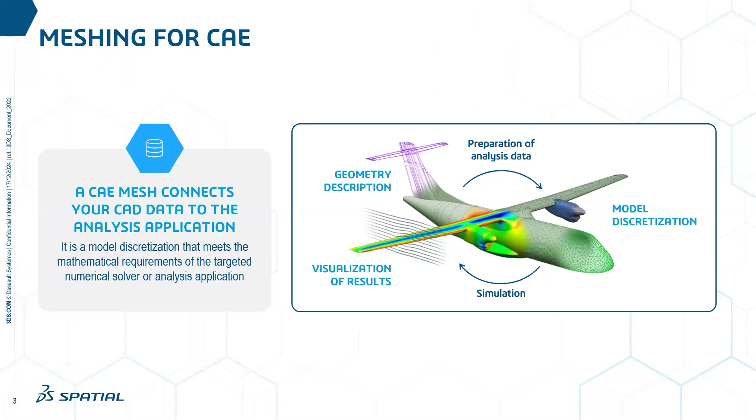In this context, this workflow, meshing is the critical link between the geometry and the solver, and thus we have to make sure that the mesh generation process is well integrated and produces reliable results tailored for the solver. I'm saying tailored because a mesh suitable for CAE application is a very special type of tessellation.

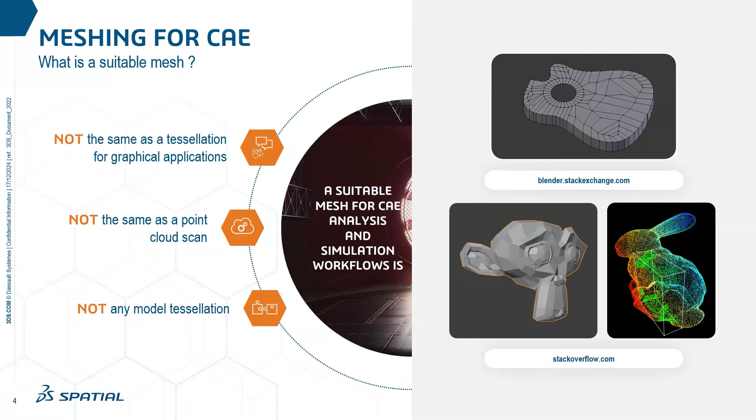So I want to give you two quick examples, two well-known examples of situations where you need to respect mathematical constraints. The first one is FEA solver validation. There, we usually want to have a consistent tessellation across an entire geometry in order to properly observe the convergence towards a solution when we're using more and more refined meshes.

And the second example is called the CFL condition for finite differences solvers. This condition has to be respected to ensure stability of these solvers. And here, for simplicity, the example is for 1D cases, but we already see that the condition depends on delta x, which would be the equivalent to the mesh size. So the stability of the simulation depends on the input tessellation.

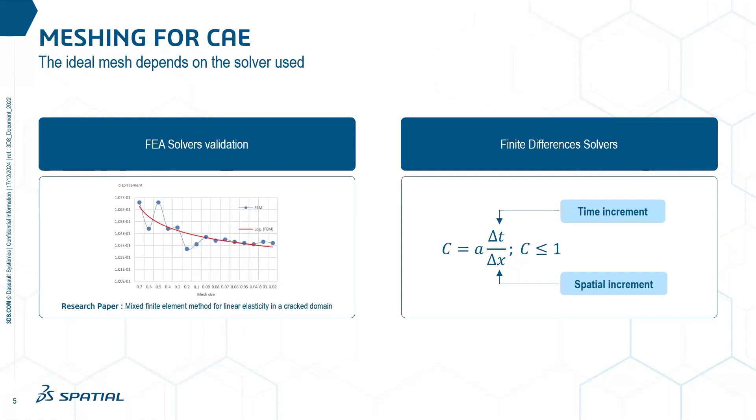And these are handpicked examples, but there are many other industry-specific solvers out there to model different types of behaviors. We can take a couple of examples. In the plastic injection industry, for example, there are solvers that model how the plastic flows through a mold, how it cools down, where weaknesses may appear in the geometry, etc.

In 3D printing, there are solvers that model how effective a given printing nozzle is, how it draws air from outside and maybe creates bubbles in the heated plastic that will later create discrepancies in the printed geometry. Or in a completely unrelated area, the medical field, there are also solvers that model how the heart of a given patient beats with and without artificial parts in it.

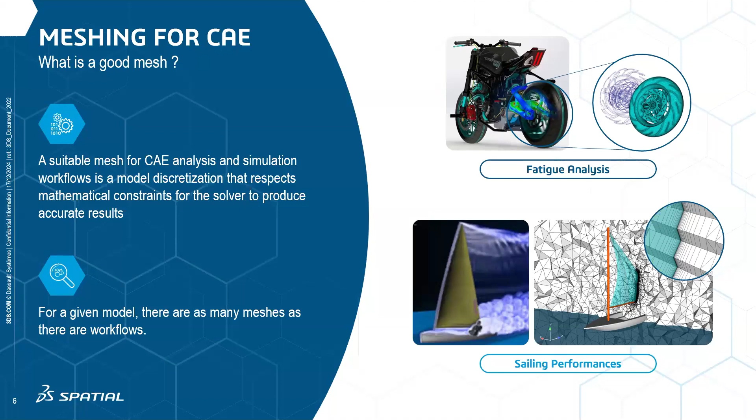You have other examples on your screen, but where I'm going with that is that all these solvers have very different constraints regarding the type of mesh they support in order to get meaningful results. So in order to support this variety of needs, at Spatial, we provide a complete set of automatic meshing components that are able to handle various types of inputs. They are able to generate a wide variety of meshes for different use cases, and they also have a large set of parameters in order to make them tightly fit the needs of the application.

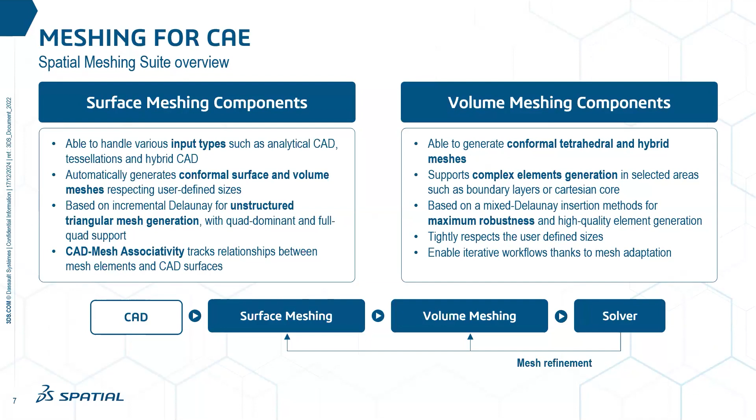However, this high level of customization can be a bit overwhelming when first being introduced to the product. And so in the next part, I want to talk about some of the usual controls we recommend to use when dealing with meshing when you are not an expert and you just get started. The first usual question to answer is what type of element is supported by your solver.

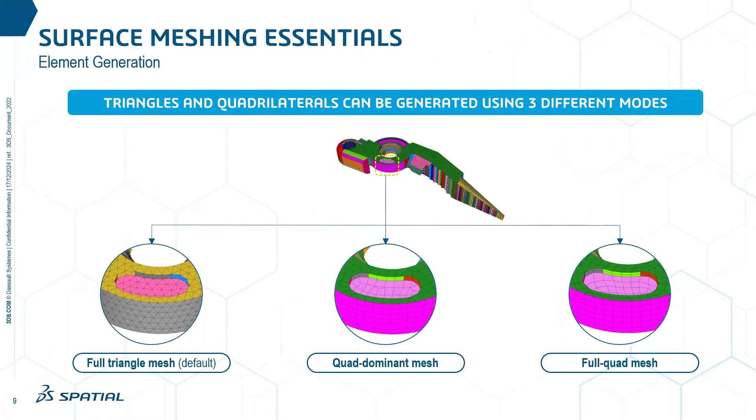Typically for surface mesh generation, our products are based on incremental Delaunay methods. And so we primarily support fully unstructured triangular meshes, but we also provide capabilities to generate quad dominant and full quad meshes to a more limited extent. Once you have chosen the type of elements that you want to generate, the more important question is how to control the mesh size in the mesh.

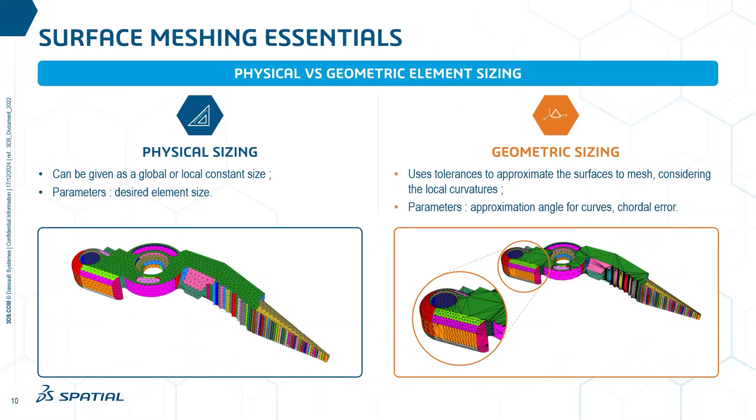We have two concepts that usually come into play. We call them physical or absolute sizing and geometric or feature-based sizing. Physical sizing is used to generate meshes with a consistent size across the entire geometry, while geometric sizing is used to approximate surfaces considering only the local curvatures. So when working with surface meshing, we usually recommend to play around with these two concepts in order to get the results that you're looking for.

And the final way of sizing is to combine the two, as well as use some level of smoothing on the final output. Using this method, you get kind of the best of both worlds, where flat details and curves are both well captured, and we also maintain a good quality of the mesh elements thanks to the smoothing between the mesh sizes. All of this has to be considered within your context and what type of requirements you have.

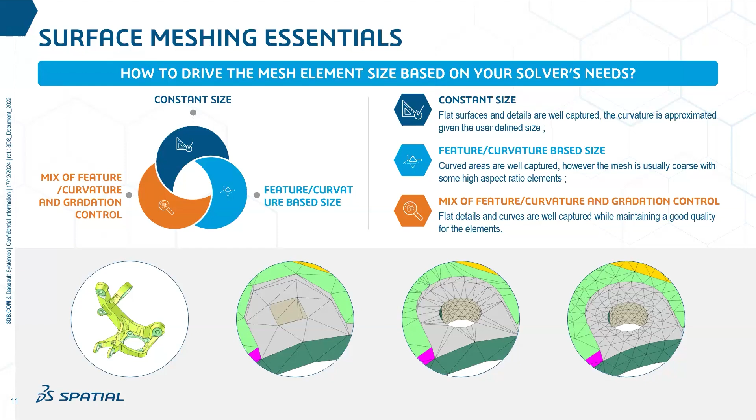Because depending on your requirements, you may want to use either a constant global size if the geometry accuracy is not very sensitive, and if the solver is sensitive to small cells. Remember the previous examples about the CFL condition, for example. You may want to use just a geometric size if the physics of the solver makes it necessary, for example in external aerodynamics or when computing boundary layer separations.

The last one being to use the gradation smoothing with a value that's suitable for your solver, because, for example, finite volume solvers are sensitive to sharp changes between consecutive mesh elements, and so you may want to use smoothing in order to get proper results.

Usually, meshing technologies, and so our meshing technology, provide controls over the maximum and minimum cell size that are acceptable. And these are used as a last-minute trim over the cell size. They are global boundaries in our algorithm, done this way in order to make sure the mesh fits the requirements of the solver, because that's the most important criterion. So that's for surface meshing.

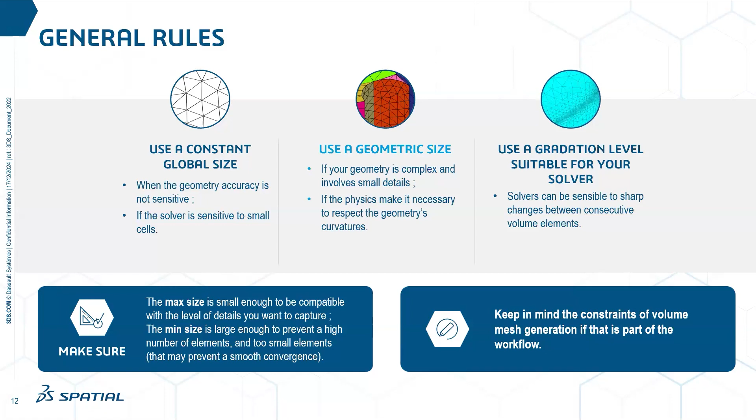And before talking a little bit about how we use volume meshing, I want to talk about some criteria to take into account when you're moving to volume meshing, because the amount of cells that we generate at this step is usually much more important. It can also have a larger impact on the time it takes to compute the simulations. So the goal for volume meshing is to find a compromise between the number of cells and the time it takes to run the simulation.

Another example I'm thinking of is when we're modeling the airflow around a 50-story building: the influence of the chamfers of the windows is negligible on the overall flow of the air, but it requires a high level of detail in the mesh, and so you essentially generate a lot of elements for no sensible gain in the simulation results. So that's the first thing to consider.

The second thing is to consider reducing the geometry to the most relevant part. That's when you have symmetries, axisymmetries, or repeating patterns in your geometry. For example, thinking of tires, you have the same pattern that repeats hundreds, if not thousands of times. And it is interesting to reduce the geometry to only 2 or 3 critical elements that repeat themselves, and you get the same kind of results that you can just repeat all over the tire.

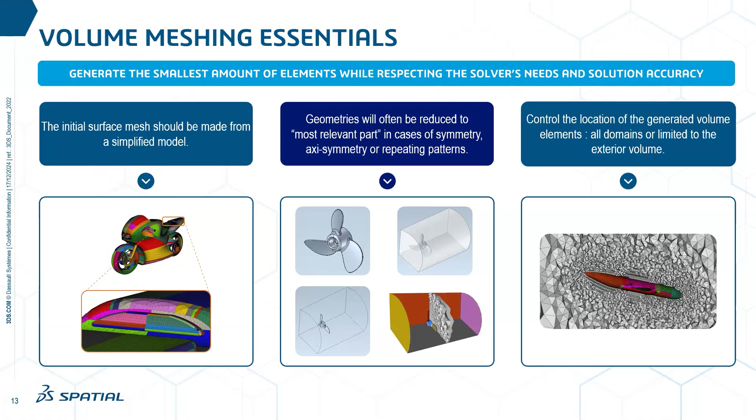With these recommendations in mind, let's talk about the very basics of how we use sizing and what kind of elements you may use in volume meshing. Okay, so here just for simple volume workflows, sizing is pretty straightforward. We have, again, just like in surface meshing, a smoothing parameter that's used to grow the size within the volume from the surface mesh. And we also recommend to use controls over the maximum and minimum element size that are acceptable in the generated mesh in order to respect the constraints of the solver used.

We also recommend to use hybrid meshes that have, for example, a Cartesian core. That's something that we do support, and it may be very useful in order to solve the numerical equations efficiently within the majority of the domain, and then let tetrahedras handle the connection to the surface. So that's for the basics.

Okay, and so the light is, sorry, I'm going to wave because the light is turning off.

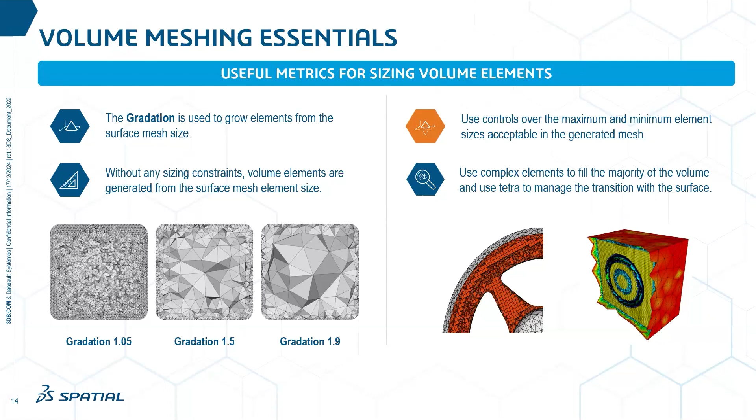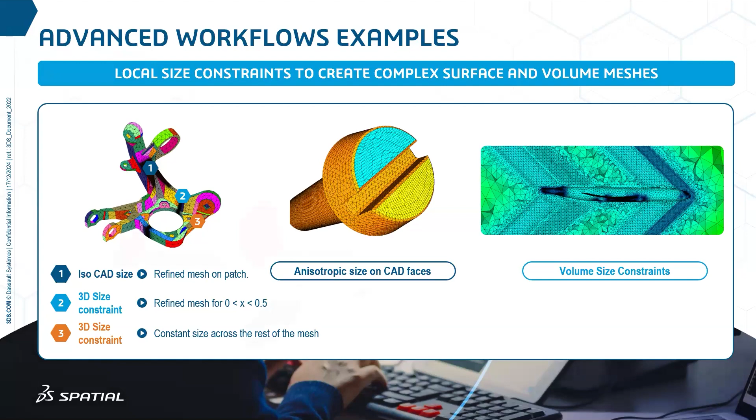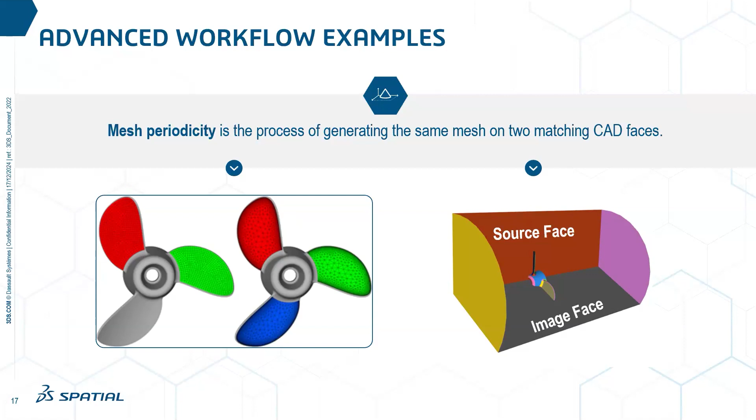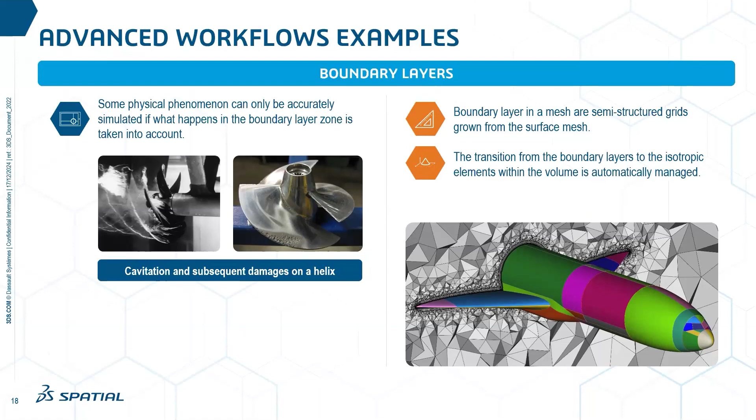For example, when you're modeling a crack that propagates throughout the geometry, you can refine where the constraints are the most important and coarsen the mesh in other areas in order to improve the time it takes to run the simulation while also maintaining simulation accuracy.

The other use case where it's useful would be to quickly generate complex volume meshes that could take a lot of time to generate in a one-step process. Using this adaptation loop, you would be able to generate a first mesh and then refine it in an iterative manner, which takes less time if you're iteratively changing the mesh than regenerating the mesh every time.

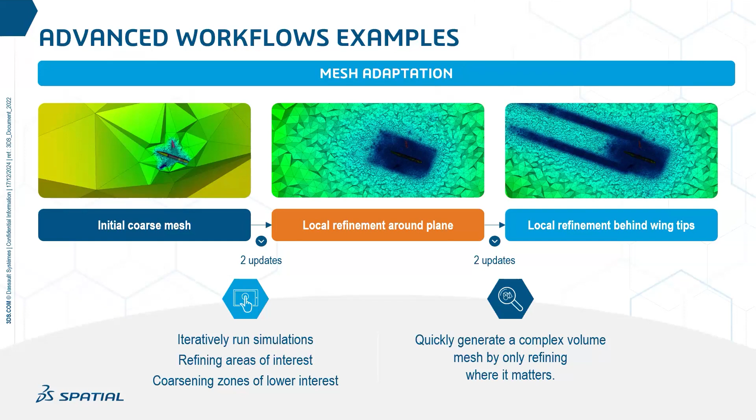So that was all the examples I wanted to showcase. And I think we can move on to the Q&A session.